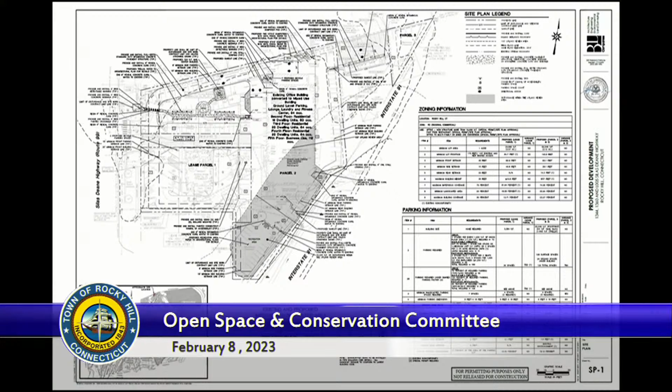That'll get us down in impervious area to 59%, a 21% reduction, going from 0.54 to 0.41 acres of impervious area.

The proposed improvements are centered in that area. There are other areas up at the northwest area that will be more of an outdoor recreation area. Again, parking spaces will be reduced overall on this site, approximately 101 spaces.

Part of that reduction is in the parking garage, and the rest is on the site. Approximately 28 spaces within the 100-foot buffer area will be removed from this upland review area. Can we go to the next slide, please?

So we have a grading, drainage, and utilities plan. The only area of minor grading within that 100-foot buffer is down at the southeasterly corner in that recreational area. We also have a replacement of a catch basin with a manhole cover up in the northwest corner, in that other outdoor space area outside of the buffer.

Can we go to the next slide? We have an erosion control plan. The soil is urban land, occurring throughout the 100-foot buffer as indicated on this EC plan. We've provided an anti-tracking apron, as well as silt fence and other measures that comply with DEEP requirements.

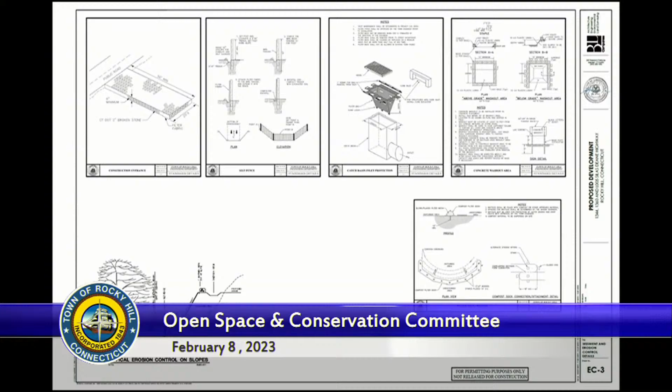Can we go to the next slide? One more after that. We have provided the details as shown here for the erosion control measures during construction. Can we go to the next slide?

And here's the landscape plan where we're adding, I believe, 9 trees. 3 of them will be within that buffer area. We are preserving the trees that are on the site as indicated on the plan. But we're also adding some additional shrubs and perennials as outlined in the schedule there. And we've also provided a vegetation coverage for each of the parcels.

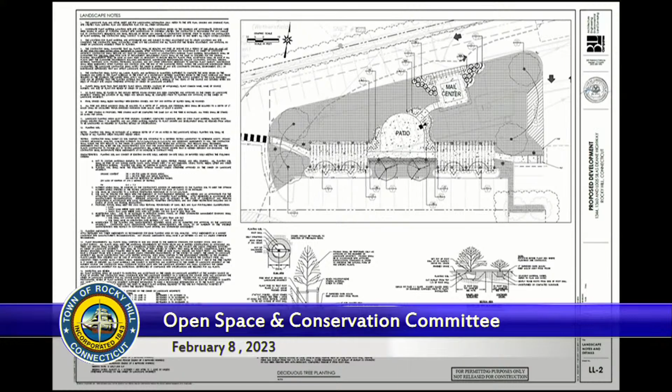Can we go to the next slide? This area is the northwest corner. It just has a little bit more detail as provided. But again, we'll be reducing the parking area, removing the pavement, and bringing the overall impervious area reduction to the site. So our request to the board is to make a determination of a Class B permit regulated activity with no significant impact on the regulated area.

And I would open it up for any questions from the commission. Thank you.

Commissioner Zampino, any questions? I don't have any at the moment. Commissioner Kurz? I do, but I'd like to ask if you could come back to me. I'm formulating my question. Commissioner Brown?

Thank you. Vice Chairman Whalen? How deep are you going to be digging to remove your pavement area out there, the asphalt? I believe it's 3 inches on 6 inches of process out there currently, based on what we've found. Are you bringing any other materials in? We would probably be bringing in topsoil just to make sure that we can establish the vegetation. Thank you, that's all I have.

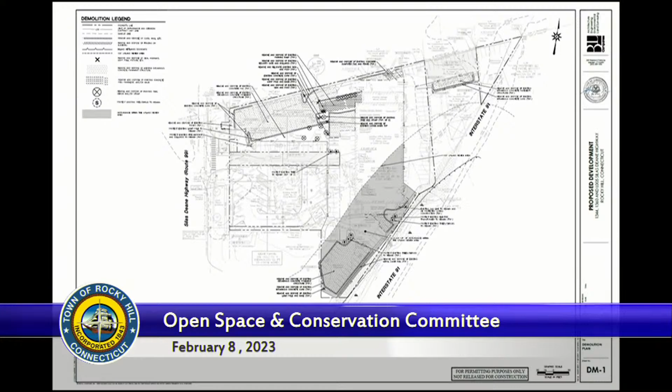It shows the existing parking spaces. I believe there's 28 of them, and that would be removed out of there. And then, obviously, making that provision to provide a planting area. So not the entire gray area - that's just showing the parcel in the buffer? Yes, correct. That's where I was a little confused.

Okay, and then can you go to the landscaping plan? LL1? Yes, LL1. I just want to confirm with me that the trees being planted on site - is there any way to confirm that they're native? That they're what? Native.

Let's see, when you get these cultivars, sometimes they tend to not be like the London plane tree - I'm not sure that one is, I'd have to double check that one. Yeah, we can double check, and we would certainly be amenable to native species, so not a problem to make that substitution.

And then, in terms of - you said that the entire site is in the floodplain, or AE? As far as the floodplain, I would say 80% of it is.

Are you proposing, it sounds like you're not necessarily proposing any additional fill? No, I mean there's minor grading because you've got to bring that different material in, and we do have some contours on there - it's a 28 and a 29, there's a little bit of a shift there, but no, we're not proposing to bring any fill. That's all my questions.

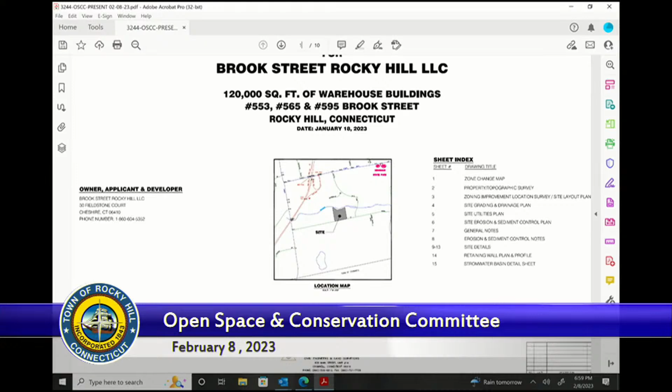Excuse me one second here, not used to your new system here, so... You want me to open and we can share? No, I'm good, thanks. All right. Okay, here we go, a little lag time there.

So start off a little bit about the site itself. What we're ultimately proposing to do is the owner would like to develop this site with 5 new buildings that would be a light manufacturing, industrial, or commercial warehousing type use. There's no specific tenant right now, he's looking to build this on speculation. In total, we're looking at building a total of 5 buildings with a total area of 120,000 square feet.

The first page I have up is an existing condition survey. The site itself is zoned OP, Office Park Zone. It has a total area consisting of all 3 parcels of 13.37 acres. Along Brook Street on the bottom, we have 179 feet of frontage. There's an existing house located on the parcel known as 553 Brook Street, in your bottom right corner or southeast corner of the site. It's a 2-story residence, and there's a large detached garage to the rear of the property.

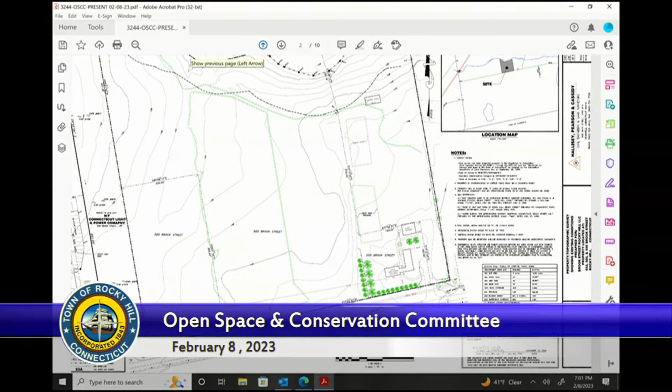To the left, there's actually a 100-foot strip of land that's owned by CL&P. There's some power lines that are actually running through that portion of the property, so that's on your left or west-hand side. On the upper portion, to the north, there is a vacant lot, and then there's also the new orthopedic building that's built in the corporate park, off on the north.

The topography of this site, if you were to walk out there, I would say the grades are gentle for the majority of it, sloping from the south along Brook Street in a northerly direction down towards the wetlands. Until you get to the far back, the grade drops off, so steeper to moderate. The overall grades change from about elevation 152 along Brook Street down to about 129 along the watercourse.

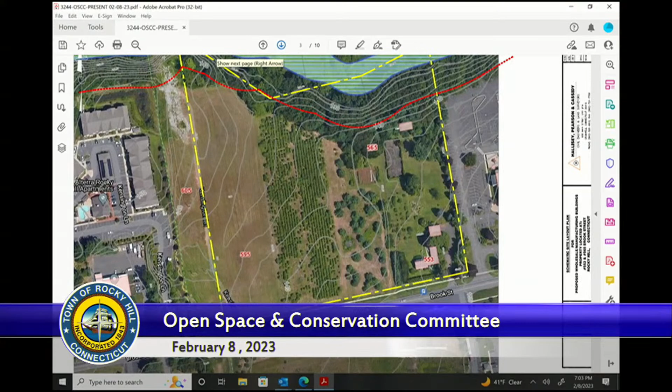The next page is our overall site layout plan. As I mentioned, what we're looking at doing is building 5 new buildings, built on spec. The 2 front buildings, facing Brook Street, have a footprint of 30,000 square feet each, with an associated parking area in front of each. They'd be built one at a time, phased out. We're not going to do all the development at once; it'll depend on what the market will bear as to the number of buildings actually built at one period of time.

The anticipation is to build the front 2 buildings first, with associated parking. There'd be 2 site access drives, one on the far left or west - there's actually an existing curb cut there that goes into the field on that portion of the property. Another one is on the far east, directly opposite the driveway for the Burris facility. This provides access around all the buildings, in addition to the front parking area.

After the front 2 buildings are built, we're looking at 3 additional buildings, each running north-south with a footprint of 20,000 square feet. Our perspective is some kind of warehouse type use, for small warehouse use. We've had people reach out for things like CrossFit facilities and similar uses, but nothing specific yet. The client is basically a developer who builds on speculation that he'd be able to get tenants for it, so there's no specific user yet.

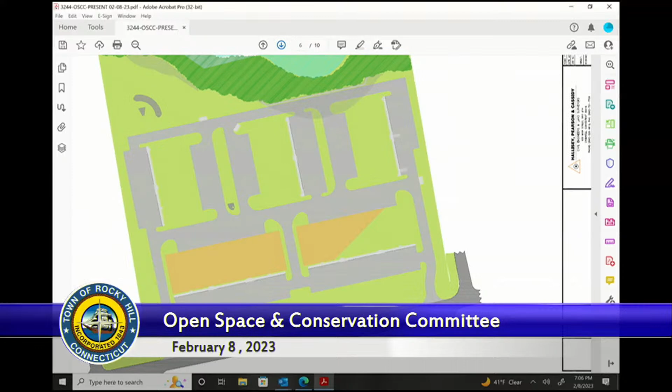Stormwater management - as I mentioned, everything slopes away from Brook Street, runs down along either the lawn surface to the west or through the evergreen trees, but eventually gets to the wetlands at the far back portion of the property. What I'm proposing is to have a series of catch basins in the drive aisles and parking areas to collect the stormwater runoff.

Between the loading areas for the back 3 buildings, you'll see 2 elongated islands. We're proposing a stormwater infiltration swale in each one of those areas, so the parking areas and loading areas can sheet flow into them. There's an outlet structure, a catch basin at the far north end, that once it builds up to a depth of about a foot, discharges into that catch basin and continues through the system running along the far north part of the property.

At the northwest corner, you see a light blue triangular area. As I mentioned, we've done a series of soil tests in this area - it's all sand and gravel. We're proposing to build an infiltration basin there. The infiltration basin is designed twofold: to handle the first flush and runoff off the site, and to ensure there's no increase in rate as it discharges from the site. This basin is designed so the bottom couple feet would allow the groundwater or collected water to actually infiltrate back into the ground.

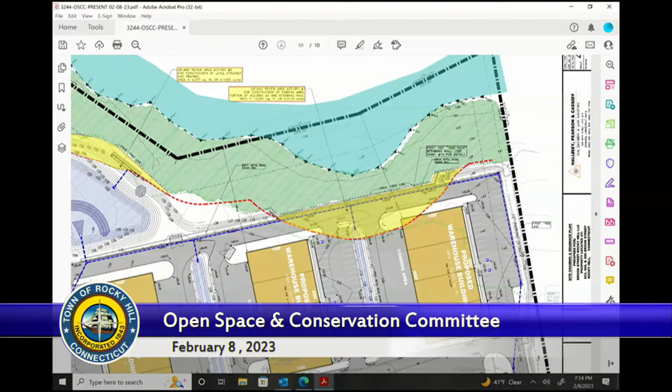I did not present you with a landscaping plan. One of the things we've been still trying to work through on this particular project is trying to figure out if there's a way we could salvage any of the evergreens that are out there. We had an arborist go out and take a look at them to see if it's possible, based upon their size, to actually transplant them, and if it'd be even worth it at the end of the day, or if we're just better off getting new evergreens.

We're definitely putting an evergreen border around the entire perimeter of this, plus additional landscaping within the island areas. But we're trying to work with someone to see if there's a way we could salvage some of those trees. It's a shame to have to remove them all. We'd like to reutilize them if at all possible.

So with that, I'm going to have Matt Davison come up and speak a little bit more about the wetlands that he found on the property. Do you know what slide you want? Maybe just something zoomed out that shows the wetlands.

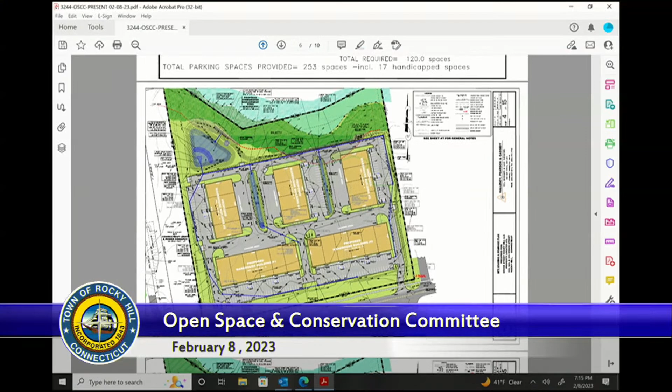Thank you, Jim. For the record, my name is Matt Davison with Davison Environmental. I am a professional soil scientist and a professional wetland scientist. I reside in Guilford, Connecticut, and I've been working as a natural resource professional in Connecticut for over 20 years now.

As Jim stated, I did delineate the wetlands on the site. I delineated them in September of 2022. The wetlands are to the north of the site; some of them are off-site to the north. I did delineate them because the upland review area does extend onto the site, and the wetland does creep into the site about midway across the northern border.

The most notable feature, of course, is Dividend Brook, which flows through the wetland. The wetland is forested. Dividend Brook, as it flows through there, is generally a low gradient watercourse. There's very little step between the watercourse and the adjoining wetlands, and the wetland gradient tends to be low throughout. It's forested through much of the wetland, although toward the eastern side it opens up into a large shrub and emergent wetland.

I did submit a wetland assessment for the record. It probably just got in today, and a few of you have probably read it. I hadn't received it by the end of the day. Oh, okay, I'm sorry, I take that back. So I did do a wetland assessment, and I'll describe to you now, if you want to take my word for it, what's in it.